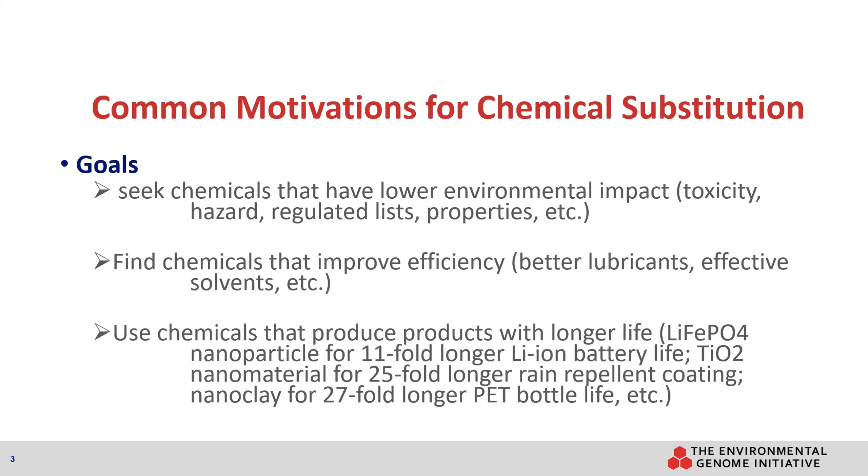So with those in background, environment is just one of several major reasons that we look at chemical substitution. Now, the basic concept is chemical A is going to replace chemical B. The first factor we need to examine is the most critical: chemical A has to work exactly as well or better than chemical B in the particular application. So this is a very engineering-based requirement.

Interestingly enough, it's not necessary that chemical A be lower cost. It can often be higher cost, because additional benefits in the product compensate for the costs of the substituted chemicals. This is generally very much related to the application. The additional factor which has emerged is the basic question: is this substitution better for the environment, or does it have unintended adverse consequences? This is what we include in the broader environmental changes.

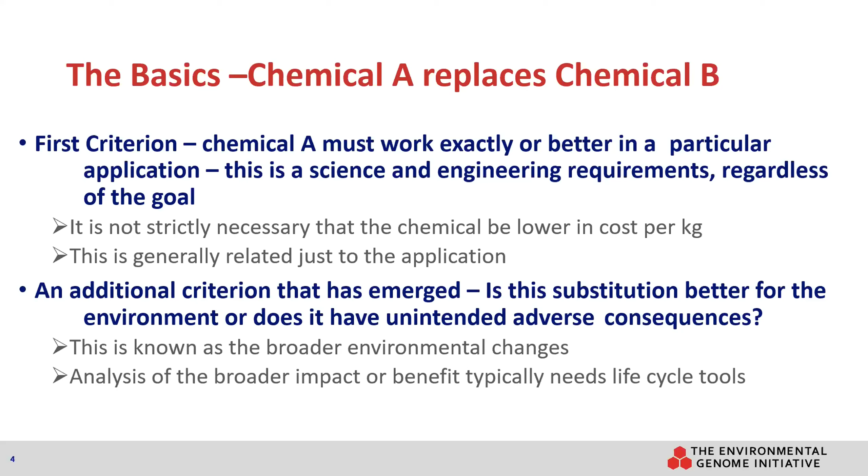The ability to make this analysis typically depends upon life cycle tools, and we're building a bigger collection and effectiveness of these tools. So, some origins of chemical substitution for the environment. This is very much a United States timeline: it began sometime in the mid-70s, when the 3M Corporation instituted a program called the 3Ps, Pollution Prevention Pays.

It was an incentive program for 3M employees to come up with new and better ideas that would reduce pollution and be compensated financially. They already had this program under the umbrella of safety and manufacturing efficiency, and simply extended it to finding improvements that would reduce pollution itself. Then in the early 80s, North Carolina, where I'm located, set waste minimization as the top priority for hazardous waste management. In our country, hazardous waste regulation began in the early 80s.

It was this period in the early 80s when we developed what's called the Pollution Prevention Roadmap. You'll see that in just a minute, but it's an interesting concept because until the roadmap occurred, that is, what do you have to do? You could basically look at 50 or 100 pollution prevention things which had been written up and not be able to do the 101st one. What do you do? And so we unified what had been done and created this roadmap for pollution prevention.

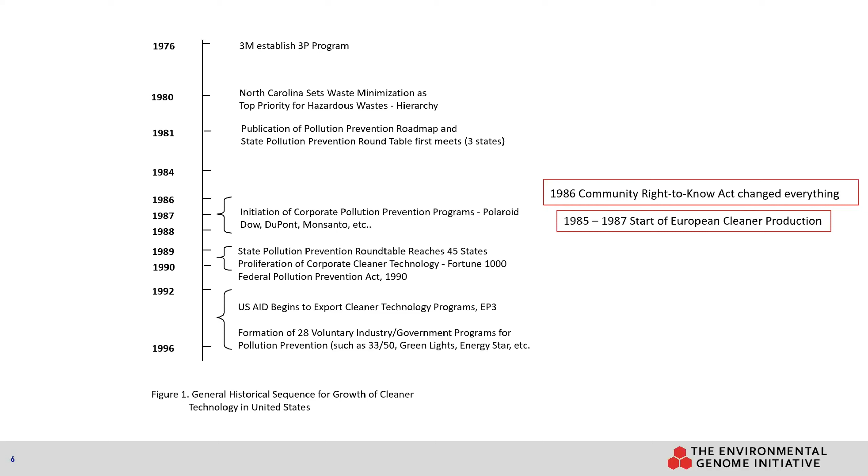And so at the same time, in the mid 80s, this concept that was developing in the previous 5 years here was started in Europe under the banner of cleaner technology. And so it began and grew along the same sort of lines which I've shown here. So that, as you can see, tells us that this idea of looking for change to prevent pollution has a substantial history to it. And so the hierarchy that came out of this is shown here.

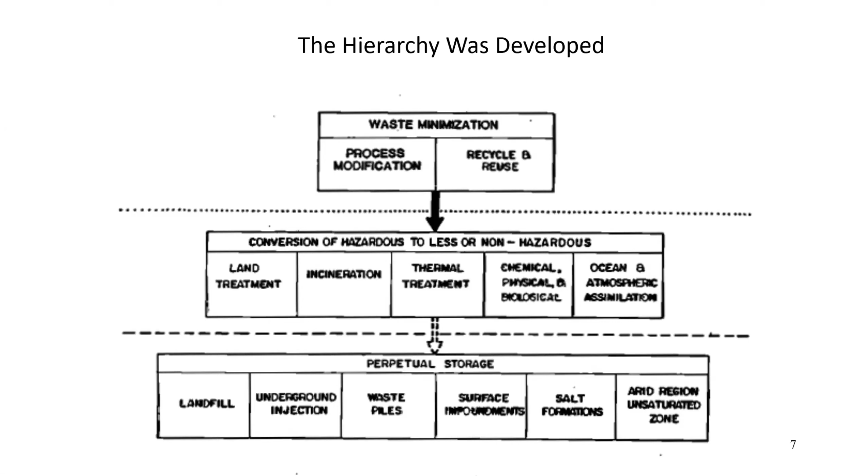And it's at the top, this idea of waste minimization that was added to the middle, which is waste treatment. And that is added to the idea that if you don't treat it, it ends up somewhere in the environment. And so that top block became the focus. People simply ask, what are you doing to prevent waste? Whether it's process modification, recycle and reuse, it didn't matter. You were at the top of the hierarchy. And that was the goal for examining how to make improvements.

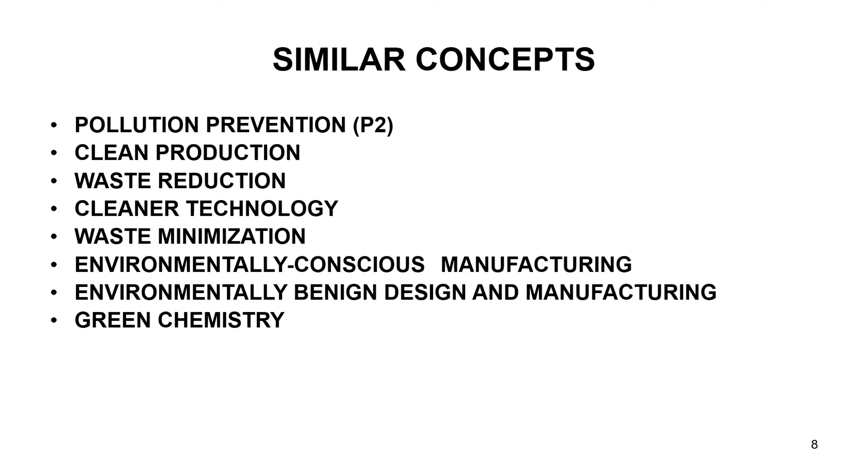So as that all began, people sort of digressed in terms of what do we call this? So in this country, pollution prevention, cleaner technology in a lot of the European countries. Now we see green chemistry, etc. These are essentially all synonyms of the same thing. And so if you do a literature search, you put in all these different terms and find a large listing of alternatives.

So chemical substitution, as I mentioned, is one of the things which was examined in this whole field of cleaner technology. But what do we mean by the broader impact? And what we have connected here, and Charpentier was one of the first people to publish this, is that we're actually dealing in industrial manufacturing with 5 different scales of phenomena. At the left-hand side, the nanoscale, that's where the molecules are reacting or they're being heated or a variety of things which are taking place at a molecular level, catalysts, etc. Those activities are occurring, however, in systems which have physical space, liquids, gases, solid media, etc. This micro scale is where molecular processes are actually translated into change.

Mesoscale is just simply the physical units, if you would, that contain the process units. We have reactors, heat exchangers, distillation columns. All these are operating at the mesoscale. So right now you can see molecular processes are affecting physical phenomena, are then affecting the behavior of the unit processes.

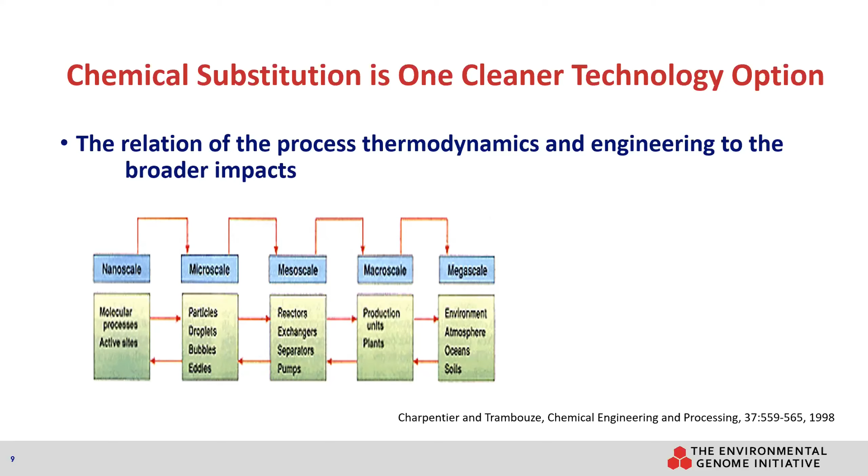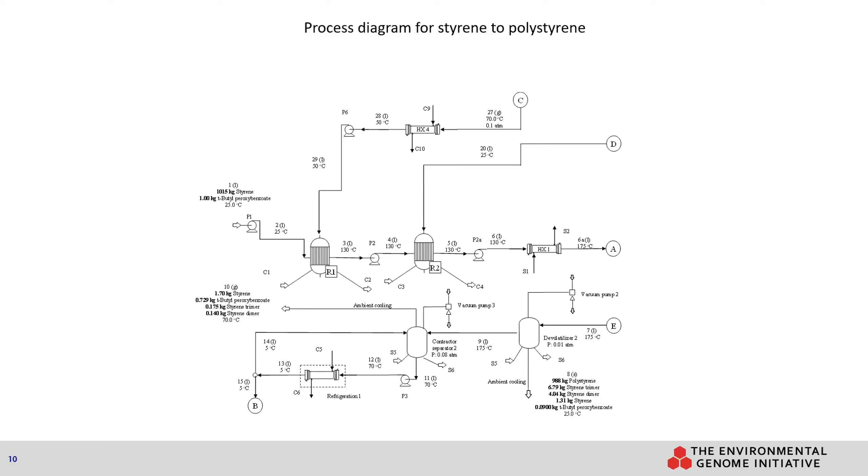And so the environmental genome is targeting providing information on the 100,000 chemicals so that people can then do analyses on trillions and trillions of products, whatever they want. Now, these products turn out to be what we as human beings have created. So the environmental genome, we say, is mapping the essential building blocks of human creativity, what it is in the products that we make.

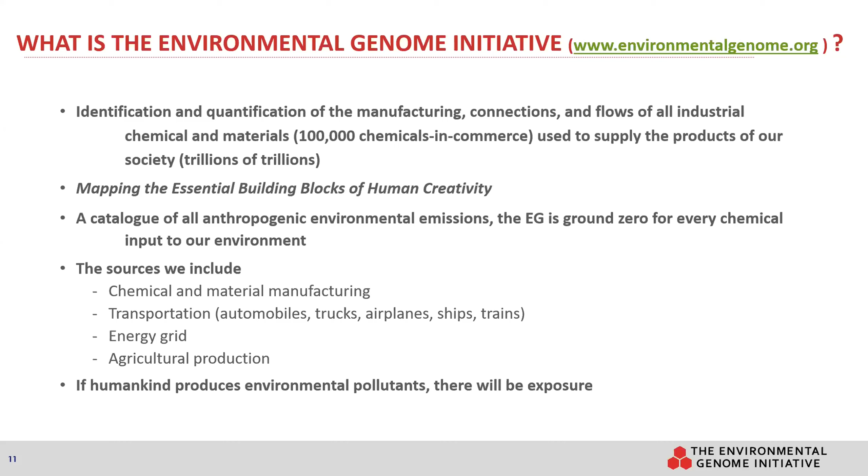So this catalog gives us environmental emissions. We are currently looking at the four major areas of manufacturing, if you would, or impact in our society, which is manufacturing itself, transportation, the energy grid, and agricultural production. So what we now know, of course, is that if there are environmental pollutants, there will be exposure, and hence the link between what we're doing in the process.

The characteristics of the environmental genome are, first of all, very high granularity, lots of definition about processes. There's data files then on the chemicals that are currently in the environmental genome, which are not 100,000, believe me. We're not there yet, but it's related to the Sustainable Materials Management Analytic Framework, which in the EU, in the IPPC, are the kinds of areas where this information is of direct value.

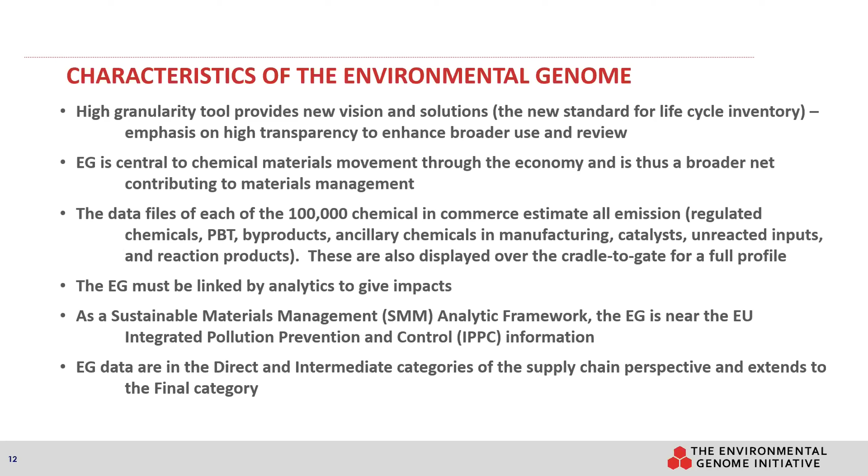So chemical substitution then, and this is a main concept, if you would, requires two things in the assessment of the chemical substitution. First of all, we need to know the environmental metrics per kilogram of chemical A and chemical B. But then we need to know how many kilograms of those chemicals go into each unit product. So this is the use of the chemicals. And these two are balanced together. You can have a high environmental impact, but a low kilogram per unit product. And that is the combined effect.

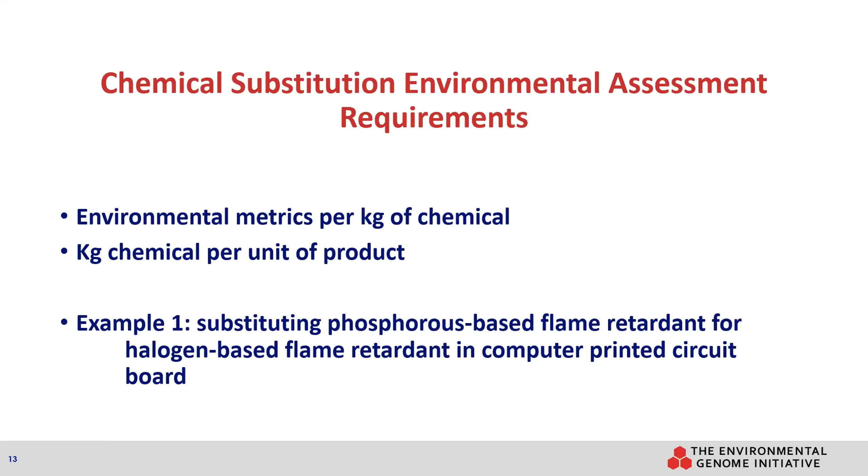So we're going to look first at example one, if you would. And it's a substitution of a phosphorus-based flame retardant for a halogen-based flame retardant in computer printed circuit boards. So obviously the motivation you can see is the one that Raisa has talked about earlier, which is we're trying to eliminate brominated, chlorinated, other halogenated materials, looking for substitution. And so the question is, is this going to be a net environmental benefit, or might it be one that has unintended consequences?

So first of all, we have to begin with the environmental metric, the environmental profile, if you would, per kilogram of product. So the brominated one, the halogenated one, which I mentioned, TBBPA, is tetrabromobisphenol A. The chemical structure is on the left-hand side of the screen here. And on the right, we're showing the chemicals that come all the way from the oil in the ground, if you would, building the molecules, and then eventually the TBBPA.

Obviously, we have to get bromine from the earth. Turns out it's mostly in places like the Dead Sea and in underground liquid deposits in the United States and elsewhere. And we need natural gas for some of the processes itself. So this is what's called a chemical tree. And I'll show you another example of this shortly, but this is the one for the brominated compound.

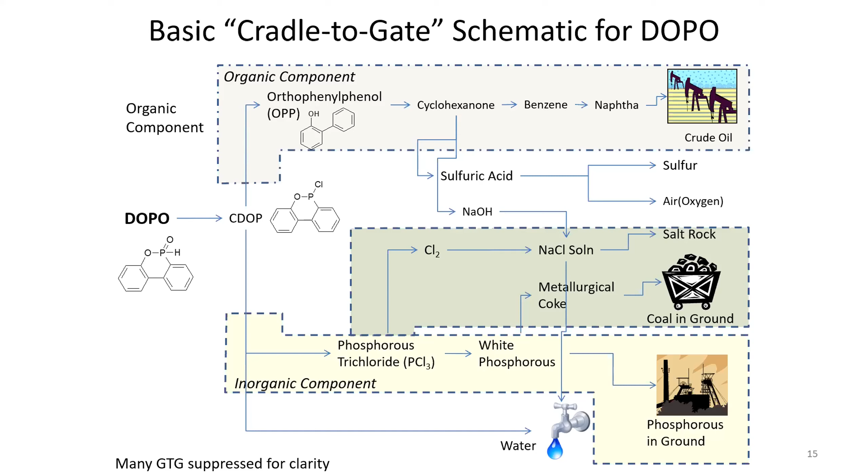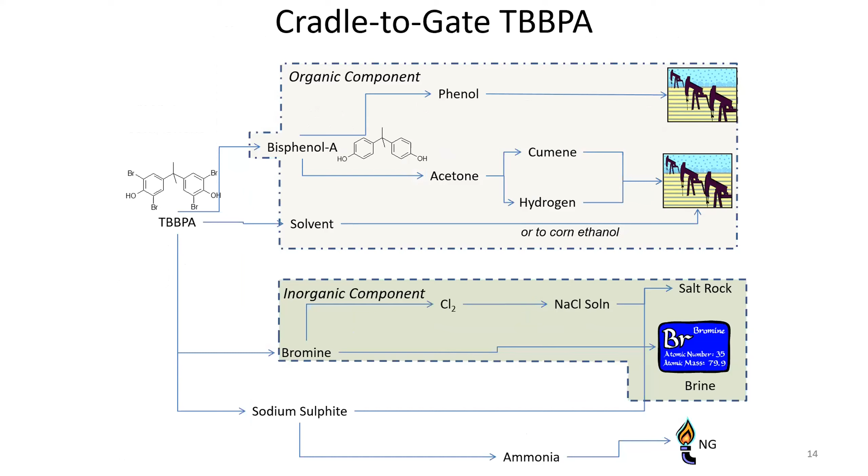For the phosphorus-based compound then, we have a similar concept, if you would. On the right-hand side are the materials in the earth, ranging from crude oil to coal, which we need for the metallurgical coke, and then phosphorus in the ground. The phosphorus-based compound has got a name which is like 5 words long. I won't give it to you, but the chemical structure for DOPO is shown on the left-hand side. So that's the flame retardant that's being compared to this flame retardant. The application, again, is computer or printed circuit board, which is a universal sort of application.

So the first step then, and I'm going to use energy as the environmental metric because it's easy to kind of get your understanding of it. For the TBBPA, if we look across the entire supply chain, we can see that we use different kinds of energy. We use a relatively modest amount of electricity. A lot of it are the things that we use in manufacturing for heating, steam, Dowtherm. Sometimes we have very high temperature processes, which is furnaces. And then we transport chemicals from one plant to the other as we build this on a global scale.

And we also have introduced the idea of energy recovery. We know that in these processes, if there are high temperatures, then there is the potential to recover that energy and use it elsewhere in the plant. And that's what we include in energy recovery, giving us a total of natural resource energy. So natural resource energy, in simple terms, is the energy of all the fuels, all the material extracted from the earth to build the individual molecules, in this case, the brominated and the phosphorus-based materials.

And so here you can see when you add these up, they're basically the same. In fact, I need to, in all honesty, tell you that in the life cycle characterizations, if things are within 20%, maybe even 30%, they're effectively the same because the amount of variability in these analyses is pretty significant. It's not like picking up a chemical and analyzing it on a mass spec. And so these are effectively the same. So in terms of the environmental metric per kilogram of material, we have effectively comparable materials.

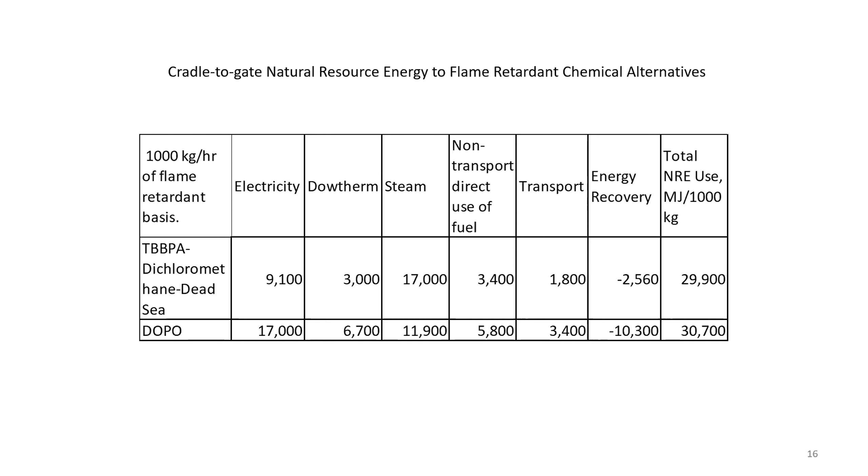But if you look at the functional unit, which I mentioned is the printed circuit board, we have, it turns out, two scales of printed circuit boards. We have large ones, which go into servers, high-end PC boards, large computers, mainframe computers, etc. And then we have smaller ones, which end up in your cell phone or your laptop. And what we have found is that the existence of the flame retardant in the printed circuit board, so this is in the physical structure of the board, adversely affects the transmission of electrons within the system, if you would. And so we have to add the right amount of flame retardant for each type of material.

And what we found is that for small circuit boards, cell phones, laptops, it doesn't make any difference. The two flame retardants can be used interchangeably. We get the effective circuit board performance that we want, and therefore either one could be substituted. And so the answer is you can go from the halogenated to the phosphorus-based one, and have this improvement.

However, for the large ones, the answer is not so easy. The phosphorus-based flame retardant has a larger effect on the circuit board performance, such that you have to add more circuit board, if you would, to accomplish the same task. And so the phosphorus-based flame retardant requirement, in kilograms per product, which is now the circuit board, is larger.

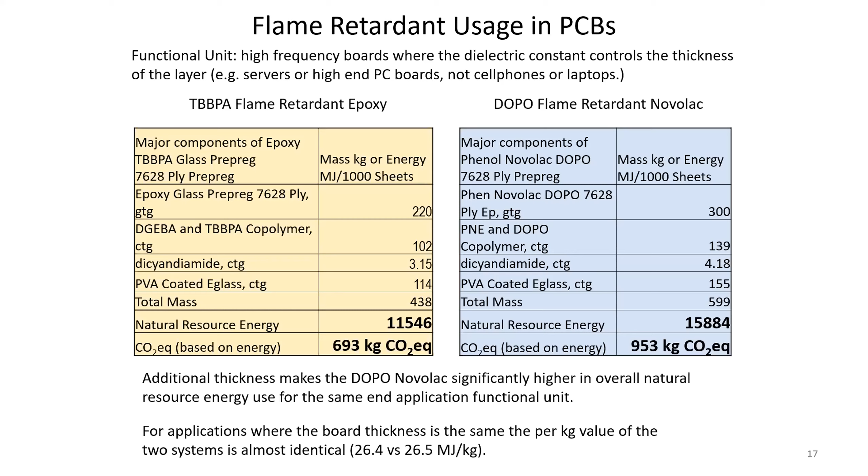And so here the chemical substitution turned out to be worse for the environment and therefore not justified based upon environmental considerations. Second example is another chemical substitution in which we're going to look at carpet. And you may or may not know, you look at the top of the carpet, that's what you and I walk on and can feel. But underneath it, there's a backing, the thing that holds it to the floor, keeps it structurally stable, allows it to be flat, if you would.

And for that, there are two alternatives that we examined. One is PVC, polyvinyl chloride, and the other is styrene butadiene latex. So the idea is, can we substitute styrene butadiene latex backing for the halogenated polyvinyl chloride backing in this commercial carpet? And so we'll use energy and carbon footprint to look at these alternatives.

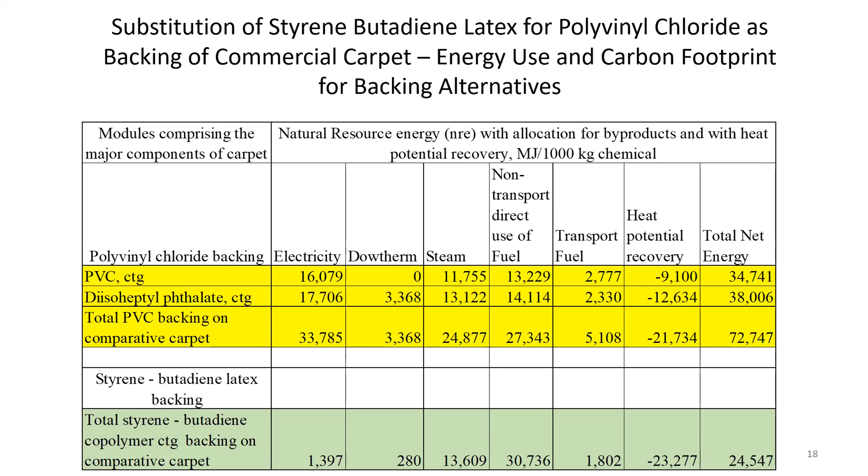And we can see here it's about 73,000 megajoules per 1,000 kilograms of the PVC. At the bottom in green is the styrene butadiene latex backing. And here we can see, with the same energy parameters, it's about 25,000 megajoules per 1,000 kilograms of SBL, styrene butadiene latex. So on an environmental metric, in this case energy per kilogram of chemical substituted, styrene butadiene latex appears to be significantly better.

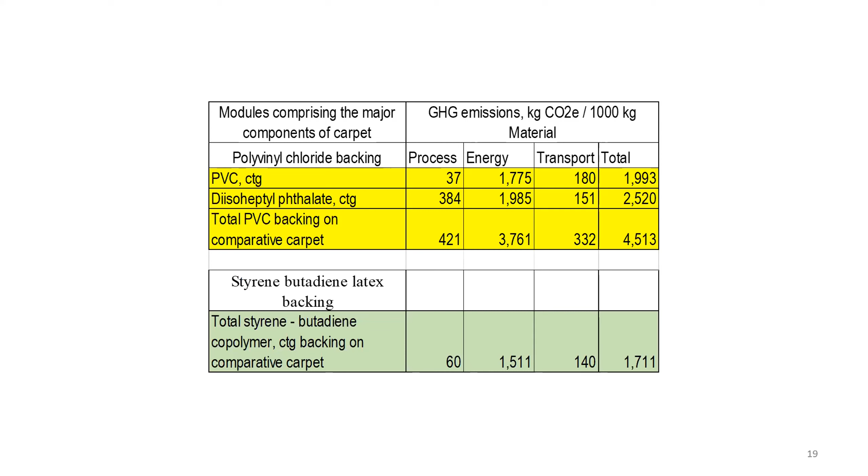Let's look at the CO2, the carbon footprint. Again, at the top is the PVC. It's about 4,500 kilograms of CO2 per metric ton. And the styrene butadiene latex, about 1,700. So again, both energy and carbon footprint, two environmental metrics, are giving us a similar direction in terms of the potential benefit of chemical A, which is styrene butadiene copolymer.

Now let's look at the carpet itself. So this is the second element, which is how much of this material is needed per square yard. SY is square yard of carpet. And here we can see, again, the difference between the two has been sustained, but is not quite as large. Remember, before it was a factor of 2 or 3 maybe. Now it's much smaller, and as a result, the answer is still the same. Chemical A, styrene butadiene latex, substituted for PVC, is a better environmental choice.

However, in context, we can realize that what we're doing is affecting one part of a product, in this case, carpet. And so you might ask yourself, well, what is the energy to make the entire carpet per square yard? Well, it's 160. So it's significantly larger. So we're affecting something which is 5 or 10%, if you would, of the overall carpet. But it is a step in the right direction.

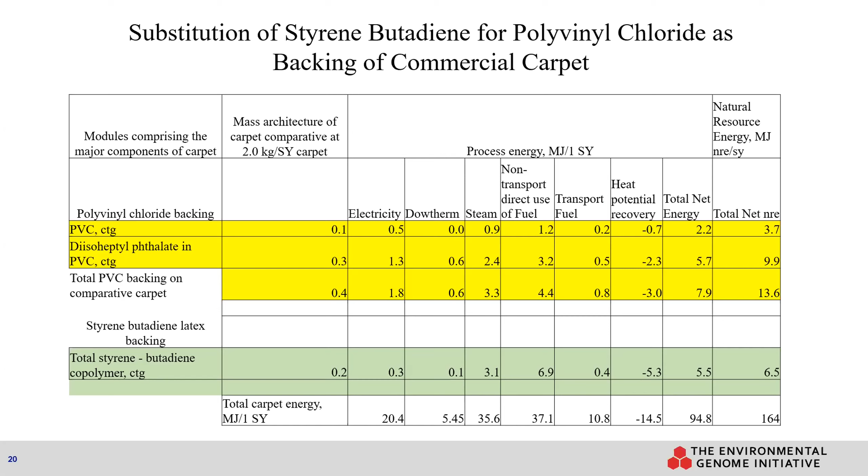And so when we look at chemical substitution, I think the thing we need to recognize is that it's not necessarily going to change the entire product in a significant way. It is going to change it in part. And therefore, that's our goal: step by step, to be making changes or improvements which lead to environmental benefits. Okay, so there's two examples, again, chemical A for chemical B being substituted.

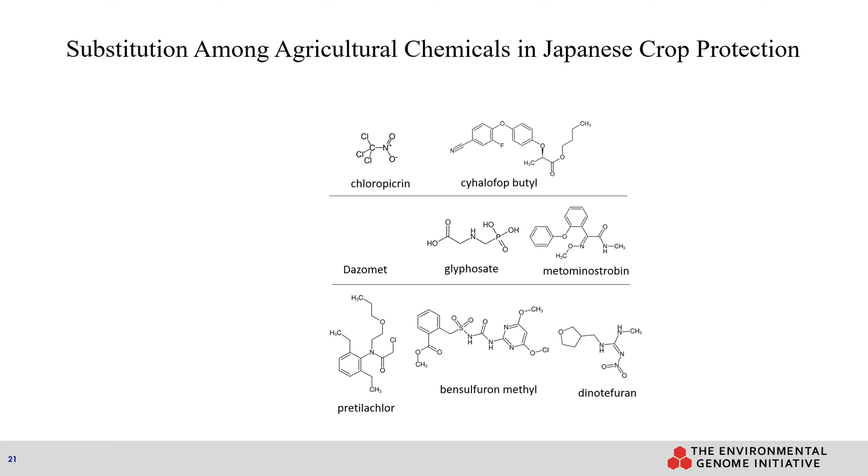Next, we're going to look at another comparison, and this is of a variety of crop protection chemicals, which I've shown here. So we have 8 separate chemicals, as you can see from their molecular formulas shown here. They're complex chemicals. So it's not going to surprise you that there's a lot of information that needs to be collected within the supply chain to be able to build these molecules. So the question is, which chemical might we pick for crop protection which has the higher environmental benefit, the lower environmental impact?

So this is the supply chain of the smallest of these chemicals, chloropicrin. And so when we use the supply chain here, there are several things that are useful information by looking at it in this sort of Excel style format. First of all, the salmon colored cells, the ones on the right, those are the natural resources in the earth. And so when the environmental genome creates these profiles, you automatically start getting information value.

In this case, if you add those up, it takes about 5,750 kilograms of natural resources to make 1,000 kilograms of chloropicrin. So again, an immediate concept of the efficiency, if you would, of the process of making this particular chemical. But then if you look within the supply chain here, for example, look at nitromethane here in the middle. If you add up the nitric acid, oxygen, and propane, those numbers are the masses, if you would. You find out it's much bigger than 395.

Basic principle, when chemicals go into a process for manufacturing, what goes in is always a lot larger than the products which come out. It's just the nature of the conversion, the chemical reactions, if you would. And you ask, where does that difference go? Those are the wastes. Those are the environmental emissions. So immediately we can get some notion, not necessarily of the characteristic of the emissions, but we get a notion of scale of emissions by looking at a chart like this. And of course, on the left-hand side is the 1,000 kilograms, the metric ton of chloropicrin. So we have to repeat this for all 8 of these chemical agricultural crop protection materials.

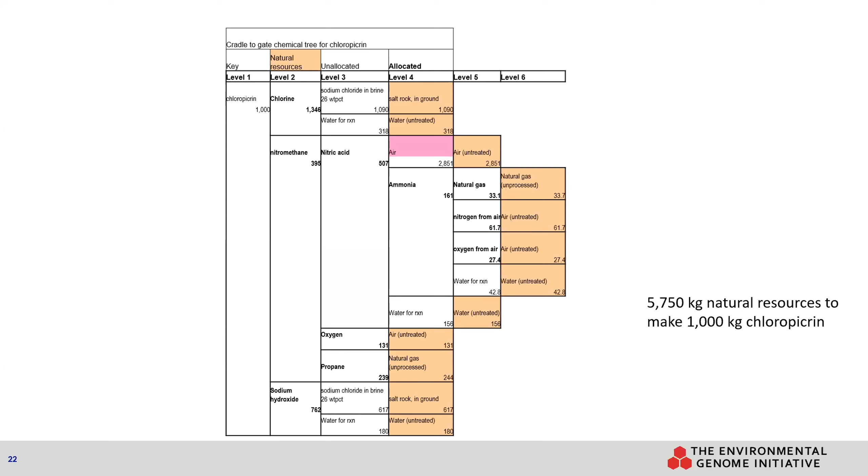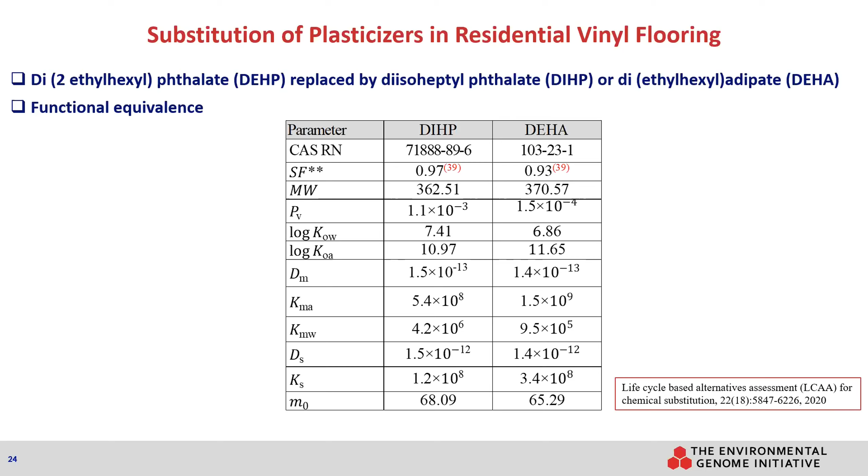So those salmon-colored cells, even though I've talked about energy impact, I've talked about CO2, there's another one, which is the consumption of natural resources. And those are the salmon-colored cells. So automatically the environmental genome is giving us another environmental metric, which is how much material are we taking from the earth to create the individual chemicals that we're interested in substituting.

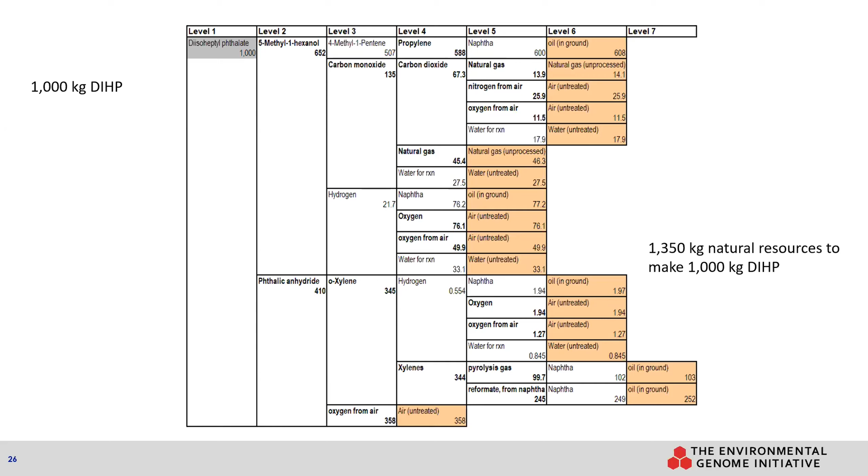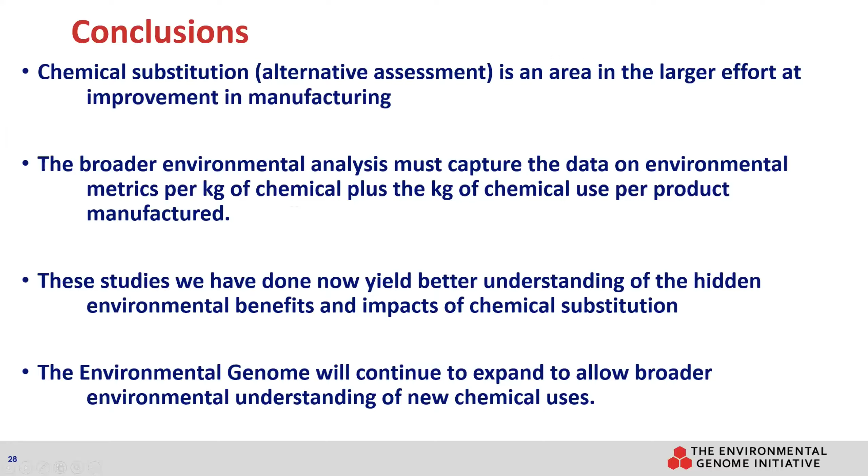Thank you very much, Dr. Overcash. That was a very informative lecture, and I learned many things. I was wondering one thing. When you calculate the environmental impact, I do not see you considering water footprint or solid waste production. I would like to know whether we can ignore them, or are they less important compared to carbon dioxide production or others. That's my first question. Did I ask the other question too? Yes, go ahead.

Okay. So when I think about life cycle analysis, sometimes I get at a loss. For example, sometimes we use raw materials which may not be environmentally friendly. What are the impacts of those raw materials we are using for a particular product? Should we include that also in the life cycle analysis of a particular product, because we could have alternative raw materials for a specific product? So these are two questions. Very good. Yes, okay, we can ask more.

So let's talk about the life cycle one first. In the life cycle, we start with materials in the earth. So everything that comes out of the earth that you've mentioned, ores, fossil fuels, etc., they all have an environmental impact at that point in time. And therefore, we have to include that in the analysis. So we do try to include that, but I have to admit, it is limited by the amount of information one may have on a particular site or location. Your question, though, about water and solid waste, in the essence of simplicity, in this lecture I've just used two, which is an air emission and an energy requirement.